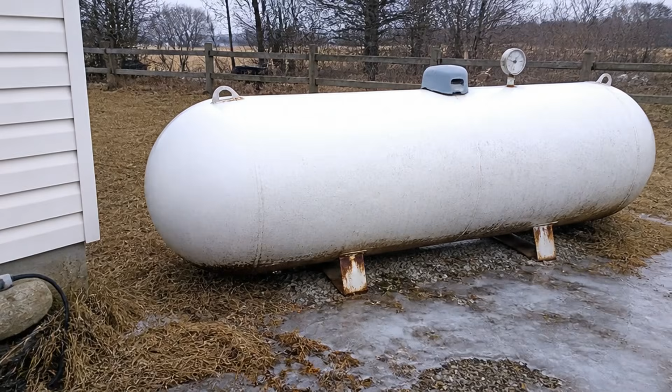It is a January morning in Holmes County, Ohio. The thermometer nailed to the porch post of my neighbor Earl's place reads 11 degrees Fahrenheit. His propane tank is down to a quarter. He called the delivery company on Monday. They told him the soonest they could come was Friday.

It is Tuesday. He has a wife, 3 children under the age of 10, and a greenhouse full of seedlings he has been tending since October that will be dead by Thursday morning if the temperature inside that greenhouse drops below freezing one more time. He has a space heater plugged in out there, running off an extension cord.

His electric bill last month was $340. The month before that, it was $290. He is choosing, right now, between heat in the house and heat in the greenhouse, because he cannot afford both. I have been watching this happen to my neighbors for years.

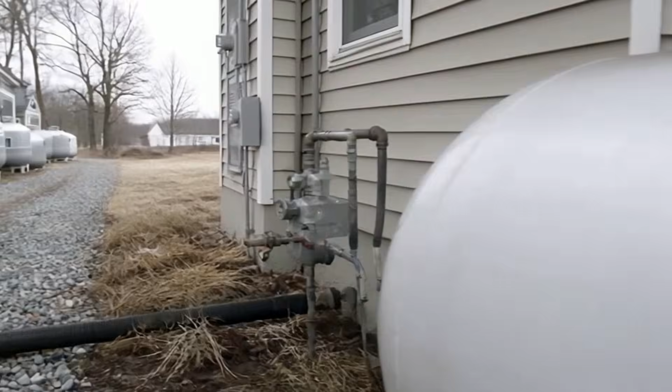The propane prices go up every winter. The electric rates go up every year. The delivery windows get longer, and the bills get heavier, and the people on the other end of all of it, the families trying to stay warm, the gardeners trying to keep their plants alive through a hard Ohio winter, they just keep paying because nobody ever told them they did not have to.

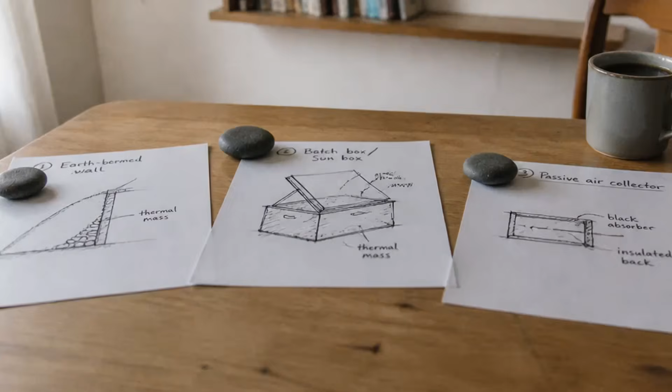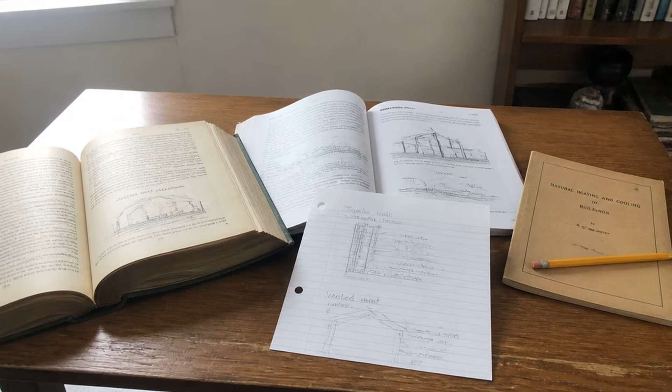Now, I want you to sit with this. There are 3 methods, all of them old, all of them free to run once built, that together can heat a home or a greenhouse through a full Ohio winter with no propane, no electric, no monthly bill of any kind. The physics behind each one is real and documented. The history behind each one goes back further than this country does, and the only reason most people have never heard of any of them is that nobody profits from a house that heats itself.

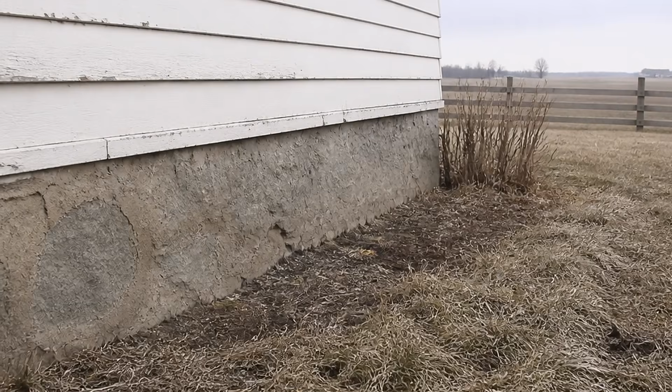My name is Amos Miller. I am Amish, and I farm in Holmes County, Ohio. My family has been farming this ground for 4 generations. The farmhouse I live in, with my wife Rachel and our children, has no furnace. It has no propane line. It has no electric baseboard heaters. It has never had any of those things. We have come through every winter this county has thrown at us, including the ones that cracked the pipes in the houses on either side of ours, using exactly the methods I am going to walk you through today.

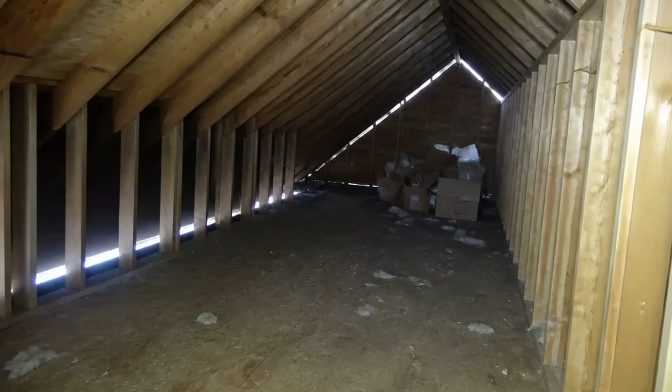The main method, the anchor that makes all the others possible, and then the 2 supporting methods that compound the effect and extend it into spaces a house never naturally reaches, including that greenhouse. By the end of this, you will understand how heat actually moves, why your house loses most of it in the places nobody is looking, and what to put in those places instead that has been holding heat for farmers and families since long before electricity was a thing anyone had thought of.

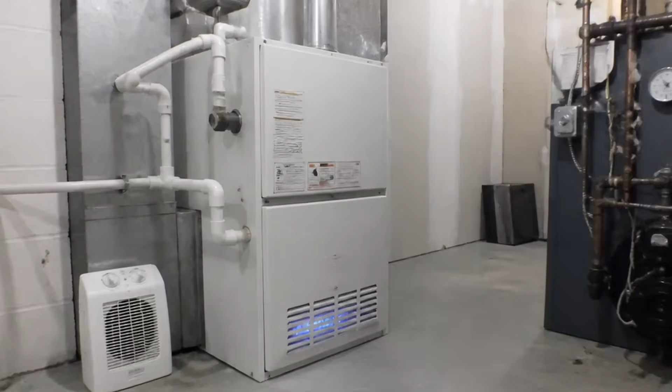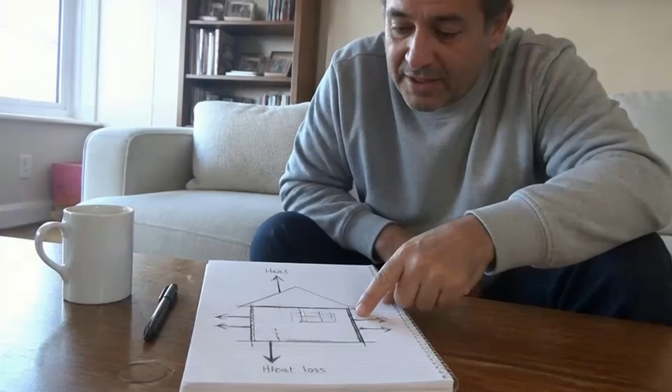Convection through gaps, and drafts that let warm air escape and cold air enter, and radiation through glass. Understand where the heat is going, and you know where to stop it. Understand how to store the heat you do produce, and you stop needing to produce as much.

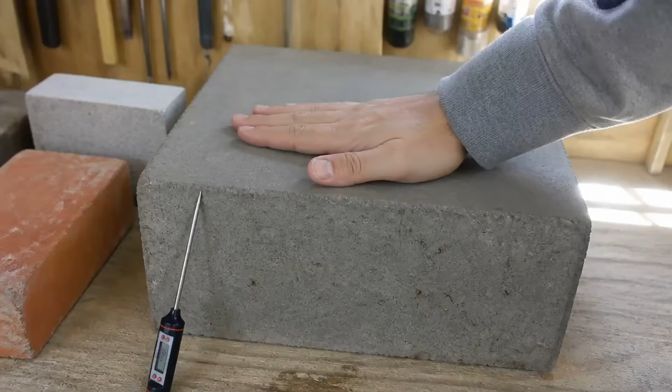That second part, heat storage, is what this whole method is built on, and it is the thing that the modern heating industry has never found a way to sell you, which is why you have never been told about it. The method is called thermal mass. It is not a product. There is no brand name for it. You cannot buy it in a store.

Thermal mass is simply the capacity of a dense, heavy material to absorb heat slowly, hold it for a long time, and release it slowly back into the air around it. Stone holds thermal mass. Brick holds it. Concrete holds it. Clay holds it. Water holds more thermal mass per pound than almost any solid material on Earth.

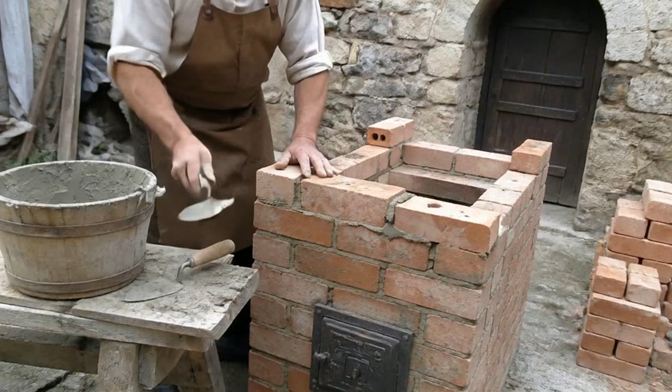This is not new science. It is as old as the first person who noticed that a stone warmed by a fire in the evening was still warm when they woke up the next morning. The entire tradition of the masonry stove, which my people have been building and using for centuries, and which was standard in farmhouses across Central Europe long before it arrived in America, is built on this single physics principle.

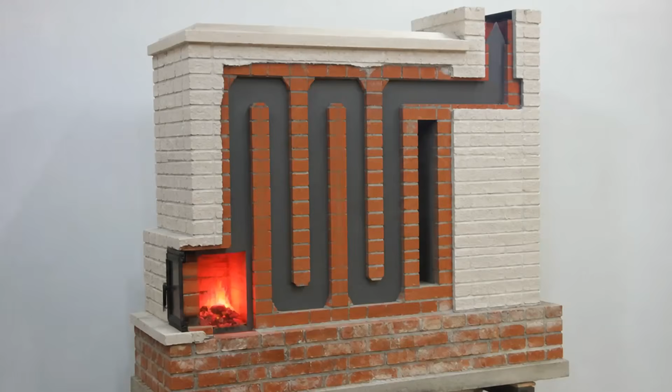You put a small amount of wood through a hot, fast, complete burn. The fire is intense and brief. The heat from that fire does not go straight up the chimney, the way it does in a regular iron stove with a thin metal body. Instead, it travels through a long, winding, internal channel built into several hundred pounds of fired brick. By the time the hot gases finally reach the chimney opening, they have given up most of their heat to the mass of brick surrounding them.

The brick absorbs that heat and holds it, and then, for the next 12 to 18 hours, sometimes longer, it releases that heat slowly and steadily back into the room, the way a stone does after a summer day, long after the fire has gone cold. A standard American cast iron wood stove, the kind most people think of when they think of heating with wood, works on a fundamentally different and less efficient principle.

It is all convection. The iron body heats fast and radiates heat fast, which feels good when you are standing next to it, but the iron also cools fast. The moment you stop feeding it wood, the room starts cooling down. You are chasing the temperature all day, adding wood every 2 or 3 hours to keep the stove hot enough to keep the air warm. A masonry heater fires once, maybe twice a day. The brick takes the heat and keeps it. The room stays at a steady, even temperature without anyone tending it.

This is what my grandfather heated his house with. This is what his grandfather heated his house with. And if you walk the old farmsteads in this part of Ohio, or down into Pennsylvania, or up through the German-settled townships of Indiana, you will still find them standing in the oldest rooms, these massive blocks of brick and tile and mortar, cold to the touch in July, and radiating a dry, even, bone-deep warmth in February that no forced air furnace has ever matched.

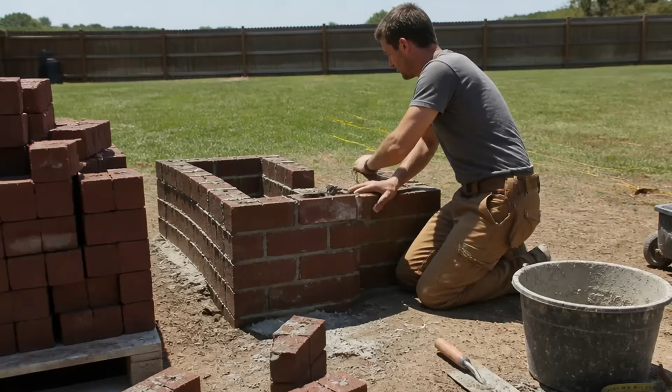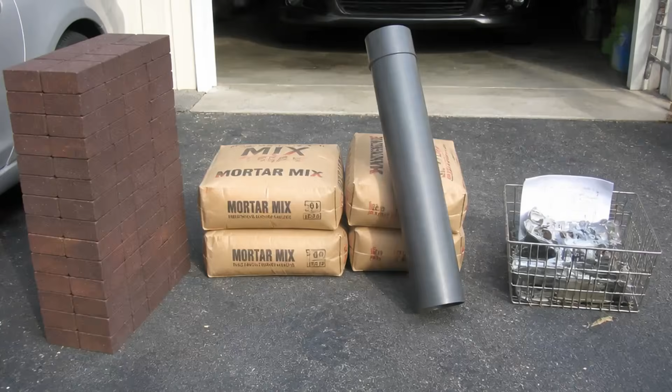Now, building a full traditional masonry heater from scratch is real masonry work, and it is a multi-week project. I am not going to pretend otherwise, but the principle scales down and can be adapted, and that adaptation is where this becomes immediately useful to most people. The scaled-down version, the one you can build yourself for the cost of materials and a weekend of careful work, is a rocket mass heater.

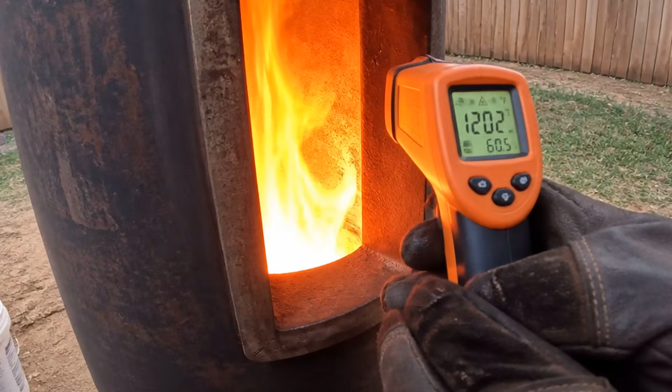The name sounds modern, and people often assume it is a recent invention. It is not. It is an application of principles that go back centuries, organized and documented by engineers who studied traditional mass heating in the 1970s and 80s, when the first energy crisis made people interested again in what their great-grandparents already knew.

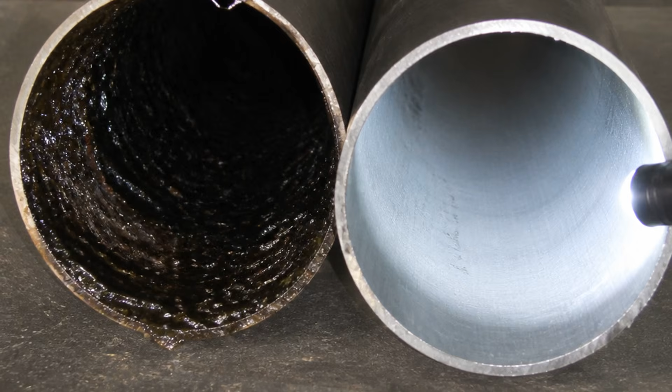The rocket mass heater burns wood in a J-shaped combustion chamber, a short horizontal feed where you load the wood, and a tall vertical riser where the draft pulls the fire upward, because the air is being drawn hard and fast up that vertical riser. The combustion temperature inside is extremely high, far higher than a conventional wood stove.

Higher temperature combustion means more complete burning, which means less smoke, less creosote, and far more heat produced per pound of wood. Most rocket mass heater builders report using 1/4 to 1/10 the wood of a conventional stove to produce the same or more heat.

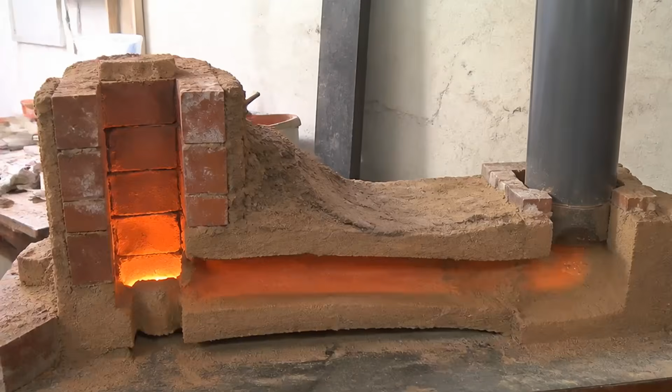The hot gases from that combustion chamber then travel through a long horizontal channel before reaching the chimney. That horizontal channel is buried in a mass of cob, which is a mixture of clay, sand, and straw, or concrete block, or brick, depending on what you have and what you are building. The mass absorbs the heat from the gases traveling through it.

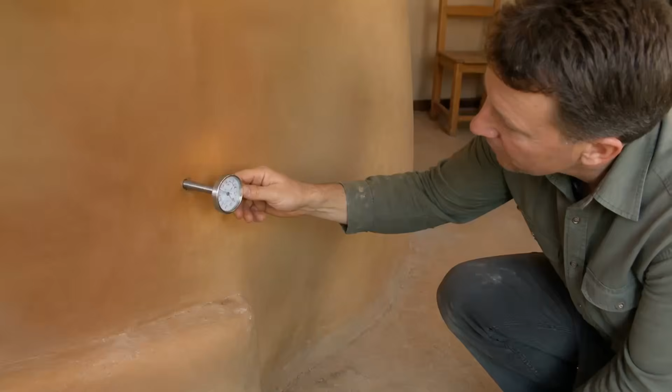The exhaust that finally exits the chimney is barely warm to the touch because nearly all of the heat has been deposited into the mass, and then for the next 8 to 12 hours, that mass, which can weigh several hundred pounds, depending on how large you build it, radiates its stored heat steadily into whatever space surrounds it.

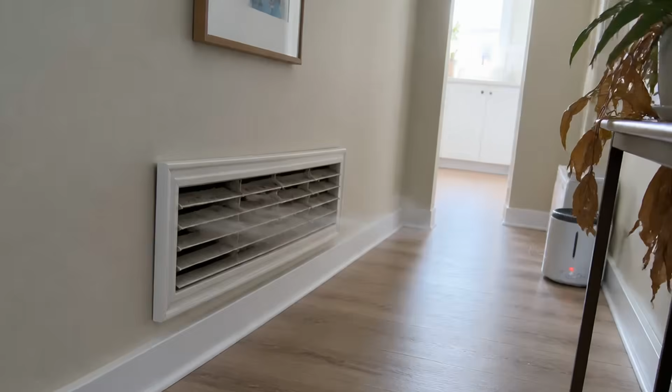The cob body of a well-built rocket mass heater reaches temperatures of 150 to 200 degrees Fahrenheit internally during firing and holds surface temperatures of 90 to 110 degrees for many hours afterward. That surface warmth is radiant heat, the same kind of warmth you feel from the sun or from a fireplace, and it warms people and objects directly without first having to heat all the air in the room.

It is a gentler, more efficient warmth. It does not dry out the air the way forced air does. It does not create cold spots near the floor the way convective heat does, because radiant heat does not rise the way warm air does. It travels in waves from the surface of the mass in every direction equally. You feel it on your skin the way you feel sunlight.

My grandfather used to say that the heat from a good masonry stove was the kind of heat that went into your bones. He was not being poetic. He was describing radiant heat transmission and the way dense materials at moderate temperatures warm the human body more efficiently than hot air does. And he knew it from 50 years of winters without a thermostat.

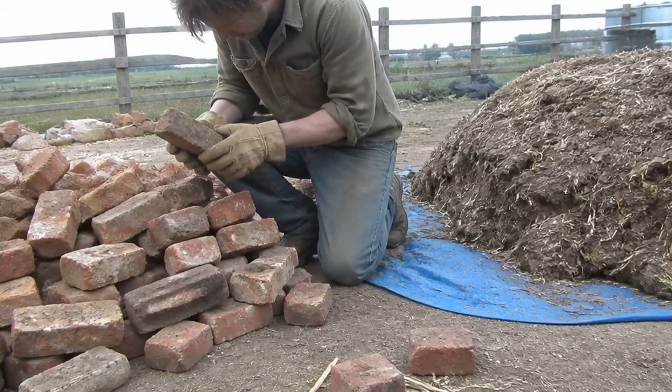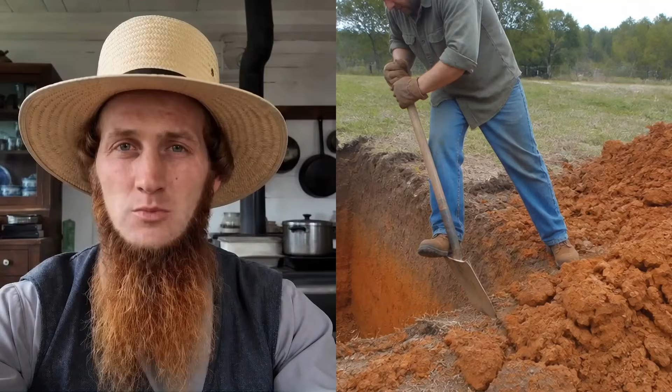The cost of materials for a basic rocket mass heater, meaning the J-tube combustion unit, the horizontal run, and a modest mass body of a few hundred pounds of cob or salvaged brick, runs somewhere between $0 and a few hundred dollars, depending on what you can find and what you have to buy. Clay subsoil dug from your own ground, mixed with sand and straw, costs nothing but the digging and the mixing. Salvaged brick from a demolition yard costs very little.

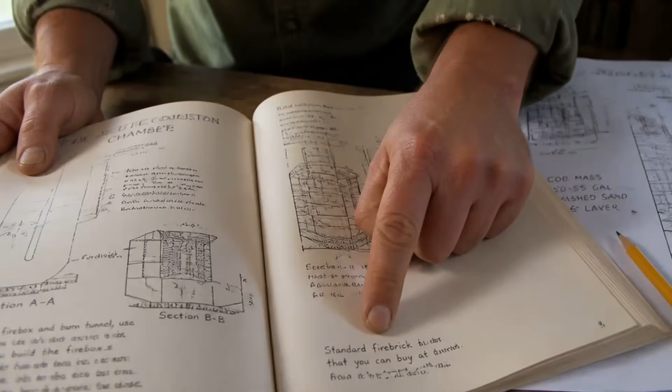The J-tube combustion chamber itself is often built from standard fire brick that you can buy at any masonry supply house, and it does not take many. There are plans in books and free online from people who have been building and refining these for 40 years. The design is not proprietary. Nobody owns it. That is, again, the reason the heating industry is not going to put it on a billboard.

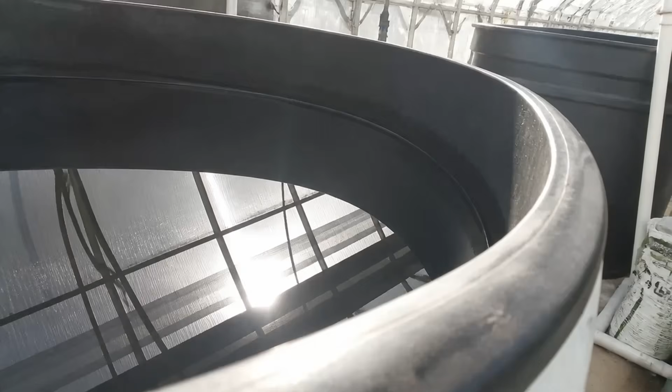Now this is where the second method enters, and it is the one that takes the heat from your house or your living space and carries it to a place a house cannot naturally reach: a greenhouse. The method is a heat sink connected to a solar collector, and it works on the same thermal mass principle with water as the storage medium instead of brick.

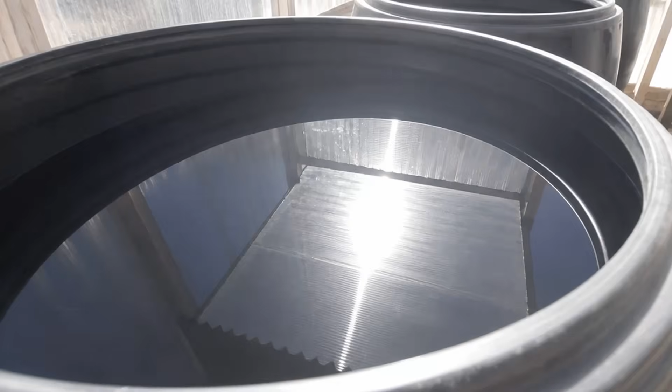The setup is straightforward. On the south-facing wall of your greenhouse, which is the wall that receives the most direct winter sunlight, you place a row of dark-colored water containers: old 55-gallon plastic drums, black or painted black, large black rubber stock tanks, dark plastic barrels, even gallon jugs filled with water and painted black if that is what you have.

The color matters because dark surfaces absorb solar radiation more completely than light surfaces. A black surface in full winter sun can reach surface temperatures of 80 to 100 degrees Fahrenheit on a clear day, even when the air outside is well below freezing. The water inside those black containers absorbs that solar radiation all day.

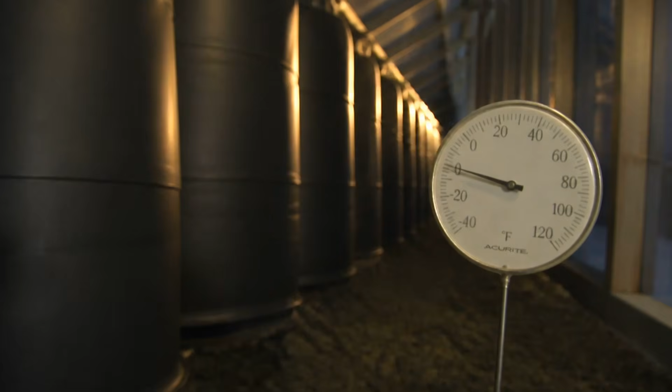By mid-afternoon, on a clear winter day, the water inside a well-positioned black barrel in a south-facing greenhouse has absorbed an enormous amount of heat. It does not feel scalding to the touch, maybe warm, like a bath that has sat a few minutes, but the volume of water holds that warmth with tremendous stubbornness.

Long after the sun goes down, long after the air temperature in the greenhouse would naturally drop below freezing, those barrels are still releasing the day's warmth back into the air around them. They are a thermal battery that charged itself for free all day and is now paying it back through the night. The sizing is worth knowing precisely.

A single 55-gallon drum of water in a south-facing position in a greenhouse will store enough solar heat to raise the overnight low temperature of a small greenhouse, roughly 10 feet by 16 feet, by 15 to 20 degrees Fahrenheit, compared to what it would otherwise drop to. If your greenhouse would naturally hit 22 degrees overnight, the water mass keeps it at 37 to 42.

If it would hit 28, the water mass keeps it at 43 to 48. In most of Ohio, that difference is exactly the gap between plants dying and plants surviving. 2 drums compound the effect.

4 drums, properly placed along the south wall, can maintain a greenhouse at temperatures 30 to 35 degrees above the overnight outdoor low on most winter nights, without any fire, without any electricity, without any fuel of any kind. Just the free heat from the sun, captured and held in the simple thermal mass of dark water.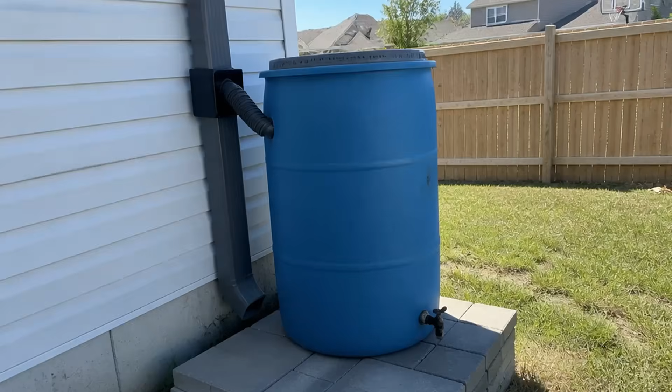The upfront cost of 5 55-gallon plastic drums, if you buy them new, is around $40 to $60 each, so $200 to $300 all in. More often, you can find used food-grade barrels at food processing facilities, car washes, or feed stores for $5 to $15 each, sometimes free. This is a one-time cost with no ongoing fuel expense and no moving parts to wear out.

The same principle, scaled up appropriately, can extend the heating season in a greenhouse by 6 to 8 weeks at both ends of the year. You start your seedlings in late February instead of April. You keep frost-sensitive plants alive into December. The growing season that Holmes County's climate would otherwise allow becomes something dramatically longer, which is not a small thing for a family that depends on that greenhouse for food or for income.

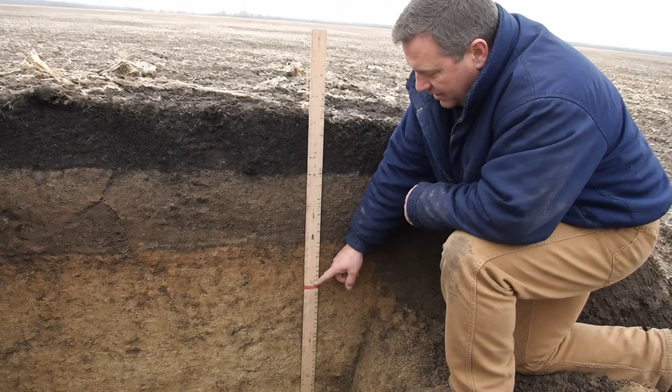The third method is the one people walk past without seeing, even though it is right in front of them. It is the ground. Not in a poetic sense. Literally, the ground under your feet. At a depth of 4 feet, in this part of Ohio, the soil temperature stays at a remarkably consistent 52 to 56 degrees Fahrenheit year-round.

In January, when the air outside is at 11 degrees, 4 feet underground, it is 54. In August, when the air is 95, 4 feet underground, it is still 54. The Earth itself is a massive thermal mass, storing the average annual temperature of the climate and holding it with a steadiness that no mechanical system can match.

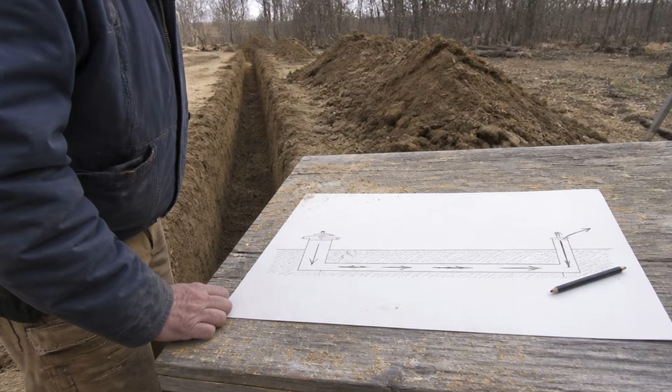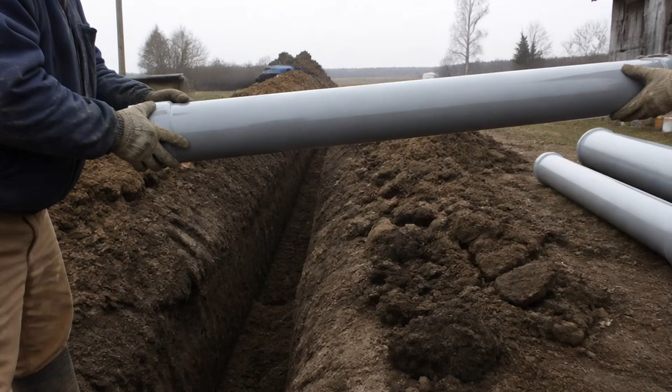The method for using this is called an earth tube, or sometimes a ground-to-air heat exchanger, and the concept is not complicated. You bury a length of large diameter pipe 4 feet deep in the ground. One end of that pipe opens to the outside air. The other end opens into your greenhouse or into your home.

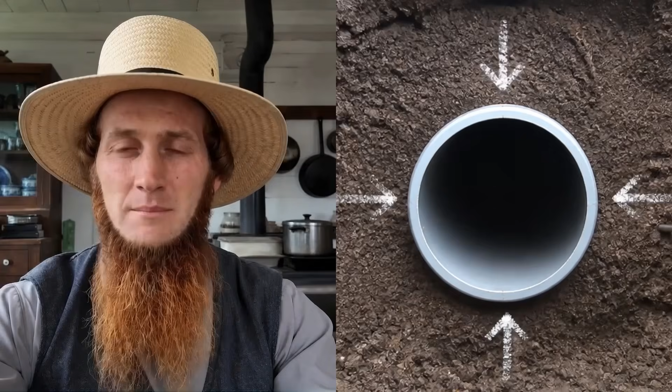When cold outside air is drawn through that buried pipe, the pipe is surrounded on all sides by ground that is 54 degrees. By the time the air travels through 20 or 30 feet of buried pipe surrounded by 54-degree soil, the air coming out the other end is significantly warmer than the air that went in. On a day when the outside air is 11 degrees, air traveling through a properly sized earth tube arrives inside at 35 to 45 degrees Fahrenheit, depending on the length of the tube and the flow rate.

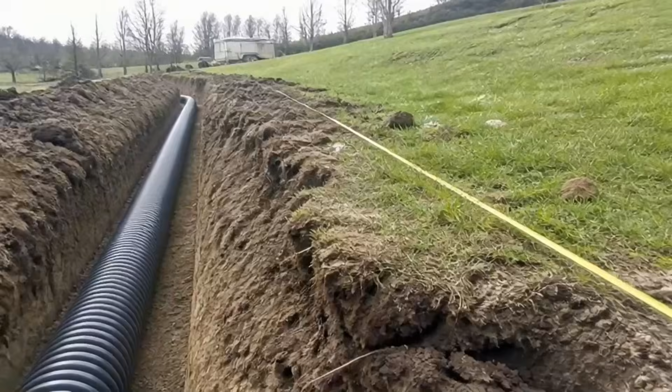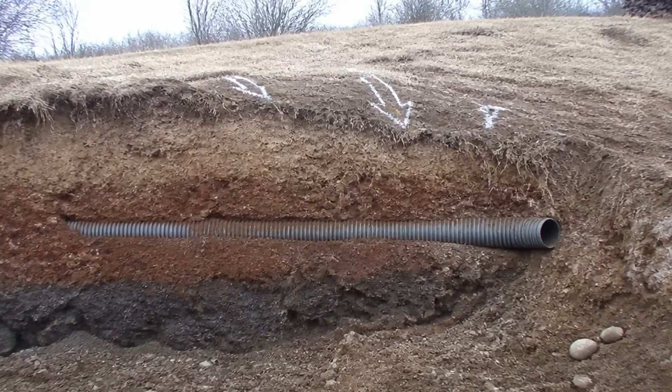That air is still below room temperature, but it is no longer dangerous to plants, and it is air that cost you nothing to warm. Partway, the earth did the work for free. For a greenhouse application, this is particularly powerful because the temperature range you are trying to maintain is narrower than for a living space. You do not need 68 degrees in a greenhouse where hardy seedlings are overwintering. You need above 32 degrees, or better yet, above 40.

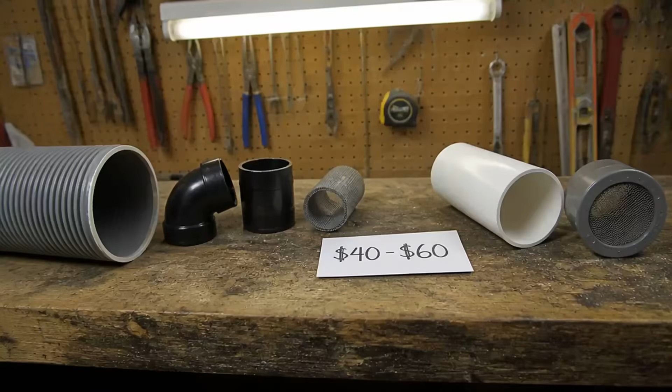An earth tube system bringing in 40-degree air instead of 11-degree air means your water barrels and your small supplemental heat source, if you have one, are fighting a much smaller battle. They are not trying to heat from 11 to 40. They are maintaining what the earth tube has already brought most of the way there.

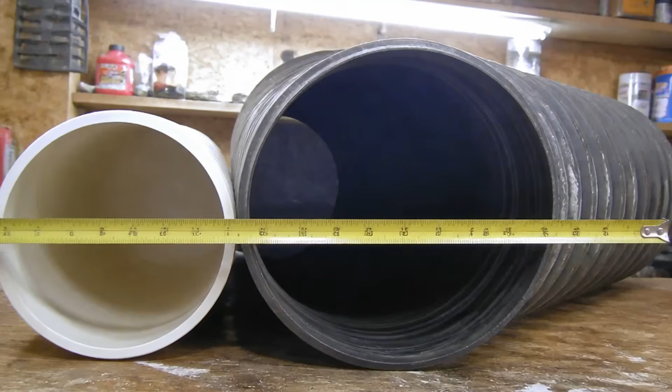The materials for a basic earth tube are a length of rigid or corrugated drainage pipe. 6 inches in diameter is a minimum. 8 inches works better. Buried in a trench 4 feet deep. The trench does not need to be long to make a significant difference. 30 feet is where you start to see strong results. 60 feet approaches the maximum benefit the ground temperature can deliver.

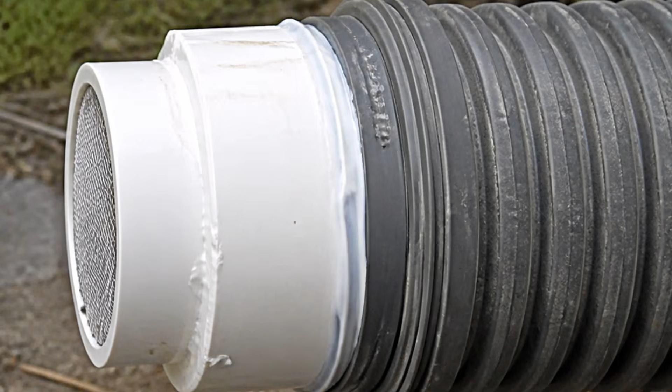In many places in Holmes County, the slope of a hillside means you can run a trench along a natural grade without extensive excavation, the way the old farmers ran their spring houses along stream banks. The total cost of materials for a modest earth tube system, the pipe, the fittings, and a simple screened intake on the outside end to keep animals out, runs somewhere between $100 and $300 depending on pipe diameter and length.

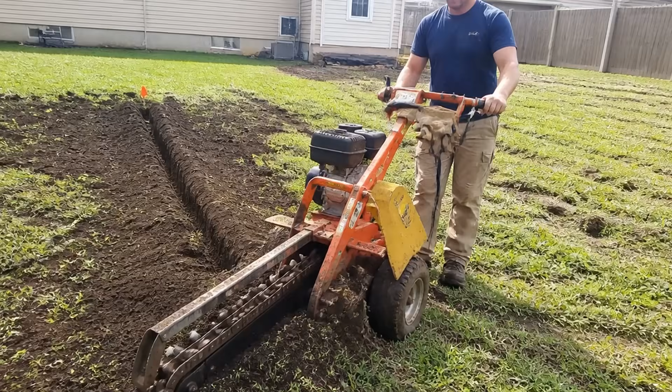The labor is a few hours with a rented trencher or a long afternoon with a spade and a strong back. Once it is in the ground, it requires no maintenance, uses no electricity, and keeps working for as long as the pipe lasts, which for quality drainage pipe is measured in decades.

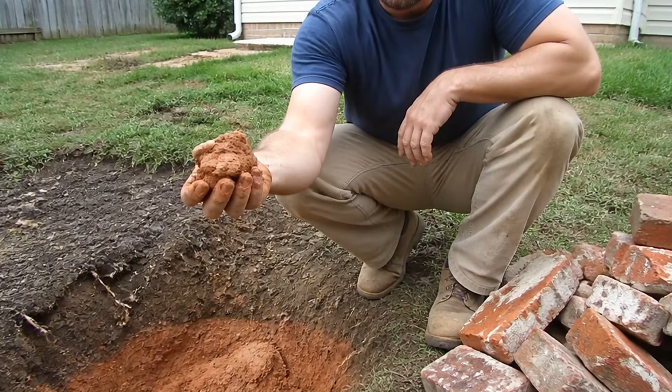Now let me put all 3 of these together, honestly, the way the old farmers counted their costs, which is to say, plainly and completely. A rocket mass heater built from salvaged brick and homemade cob: material costs under $200 for most people, often under $100 if you have clay subsoil on your property and can find used brick.

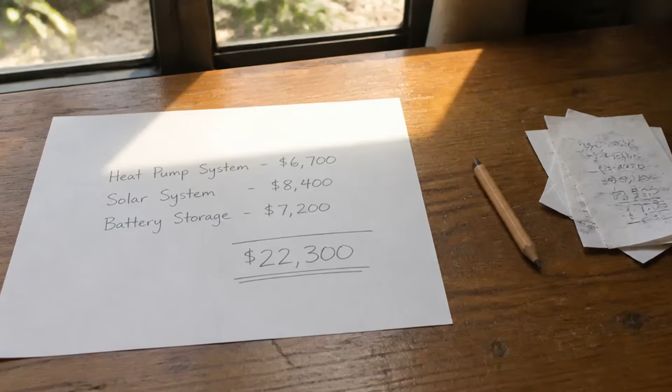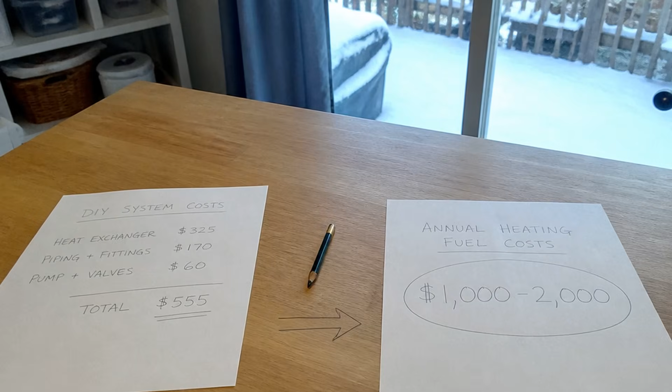A set of 4 55-gallon black water barrels positioned along the south wall of a greenhouse: material costs $50 to $200 depending on whether you buy new or find used. An earth tube, 30 to 60 feet of 6-inch drainage pipe buried 4 feet down: material costs $100 to $300. Total outlay for all 3 systems combined, under $600 for most people, often significantly less.

Against that, the average American family in a cold climate like Ohio spends somewhere between $1,000 and $2,000 a year on heating fuel alone, not counting the electric bill that heaters and fans and thermostats add. The math of the first winter speaks for itself. The math of the second winter, and the 5th, and the 20th, with none of those bills coming due, is something different altogether. But here is the part that goes beyond the math, and is more important than the money. And it is the part I want you to sit with before you go.

My neighbor Earl, the one I told you about at the start, is at the mercy of 2 companies and 1 delivery schedule for the most basic thing a family needs in January: heat. The propane company sets the price. The electric company sets the rate. The delivery truck sets the schedule. He has no part in any of those decisions and no way to change any of them. When the price goes up, he pays it, because what is the alternative? When the truck cannot come, he waits, because what is the choice?

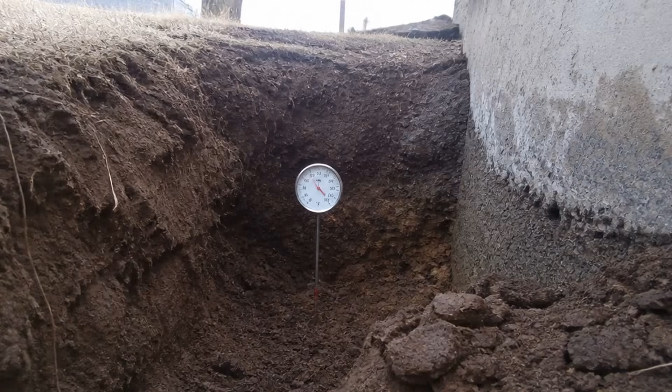That dependence, that helplessness at the exact moment of the year when you need warmth the most, is not an accident or bad luck. It is the designed condition of a system that profits from monthly payment and has no financial interest whatsoever in the permanent solutions I have described to you today. A house heated by a masonry mass and managed by a family that understands how heat works sends no monthly check to any company. A greenhouse kept alive through February by solar water mass and ground-warmed air owes nobody a bill. These systems belong to the person who builds them.

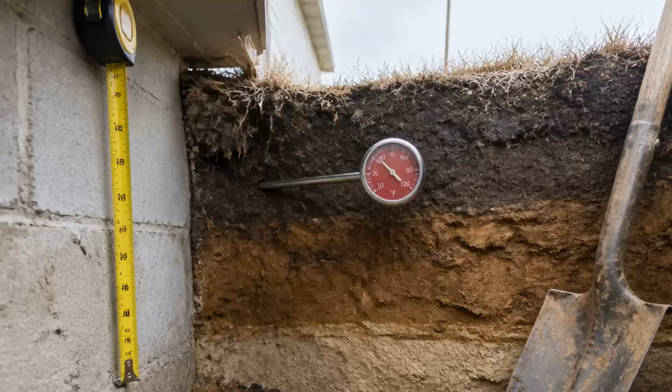They cannot be repossessed. The fuel company cannot raise the price on the wood you cut from your own land or the sunlight that falls on your own south wall. The earth under your feet maintains 54 degrees, regardless of what is happening to the energy market. That stability, that ownership, that independence from a monthly bill for a thing as old and basic as warmth is what my family has had for 4 generations on this land, and what every family on every piece of ground in this country could have if someone would just tell them how. That is the only reason I am standing here telling you.